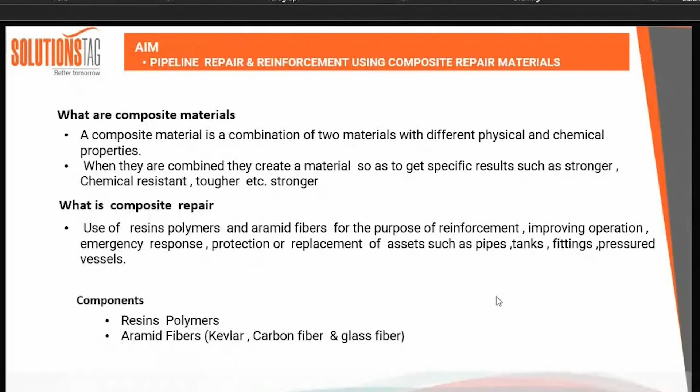In energy, oil and gas industries, we have composite made pipes, and we're going to see how it is being done. Today we'll be talking mainly on pipeline composite repair. So this, of course, is a new technology. It has not been used at a large percent in Tanzania. So it's something which we're going to introduce to you guys. But for other countries, it's something which has been done for quite some time now.

So for our composite repair materials, of course, there are standards which guide us for the application or the repair, and they are tested and approved by both ASME and ISO as well. And they have several features. Just to mention a few, our composite repair can hold up to 200 bar. It can withstand up to 150 degrees Celsius.

The repair life can go up to 20 years. It is resistant to harsh environments. Once you install it, it is not corroded by weather, water, or oxygen. And also it is unreactive to chemicals. Mostly all the hydrocarbons are unreactive to the repair as well.

So before I dive into how it is being done, just to check on the conventional means which we use for pipeline repair and the challenges which we face. For instance, for quite some time, people have been using clamps for repair. For instance, some place is leaking, so they introduce a clamp. The major challenge with this is that it is heavy. So for mobilization or installation, it requires a lot of lifting. But also, it is introducing another weight to the pipeline, which is also affecting its integrity as well.

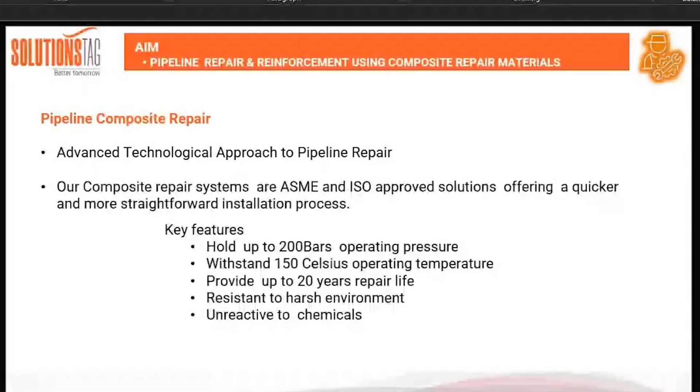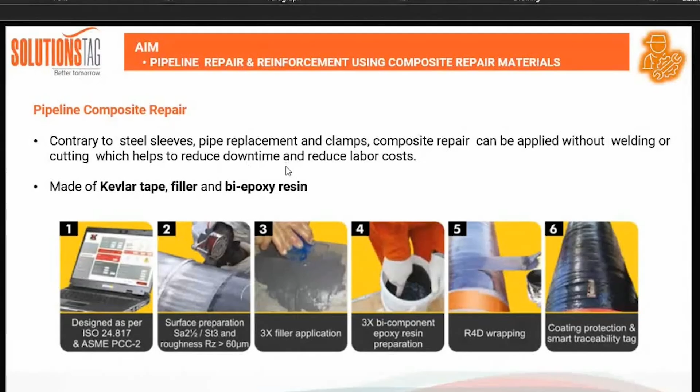Now, at this point, please can you also confirm that we're on the same page? Anyone, please, Mr. Stevens, Raymond, Misana. Can you all hear me? Mr. Barakari, can you hear me?

Anyone? Yes, we hear you. Oh, okay. Okay. I think it is good if you can get a response from you guys. It will be better. Thank you. Thank you so much.

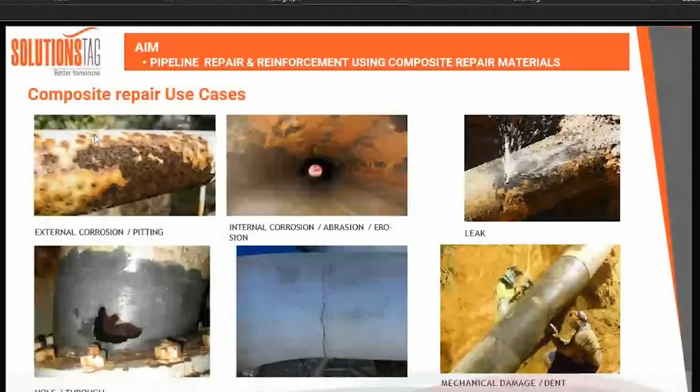Another case study, maybe you can see it is from... yes, apologies, unfortunately, my network... Okay.

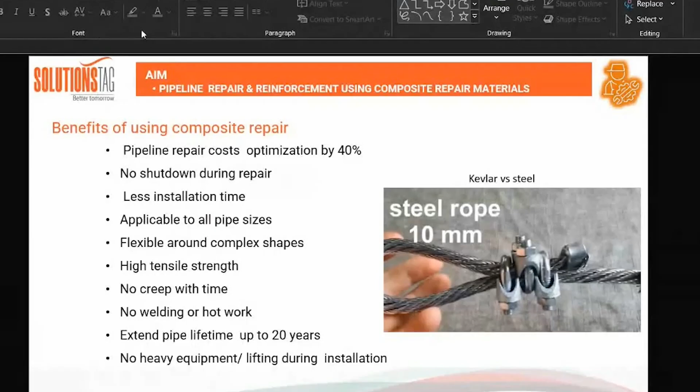Okay. Let me proceed. So the benefit of using composite repair. So I think by now most of these benefits I've already discussed with you from the beginning. So the composite material reduces the cost of repair by 40%. It can be more or less depending on the situation or the extent of defect. There's no shutdown required during repair, so the operation proceeds as usual. The installation time is minimal. In 1 hour, 2 hours, the installation will be done.

All pipe sizes can be used, and it is flexible around complex shapes as we saw earlier. It has high tensile strength in comparison to steel as well. There's no creep with time, meaning that it does not degrade with time. And also another advantage is that there's no hot work required during the repair, so there's no risk introduced to the repair. It has a lifetime of 20 years, and also there's no heavy lifting required during the installation.

So just to get a perspective of how strong Kevlar is, I think you can all see the video from the right. So this is the comparison of 10 millimeter steel rope and Kevlar fiber or Kevlar rope. So they introduced this to a pressing machine and try to stretch until it snaps. So for the steel rope, it goes up to around 4 tons. Then it breaks. So in the same comparison, using Kevlar rope, which is also around 10 millimeter, we're going to see its yield strength.